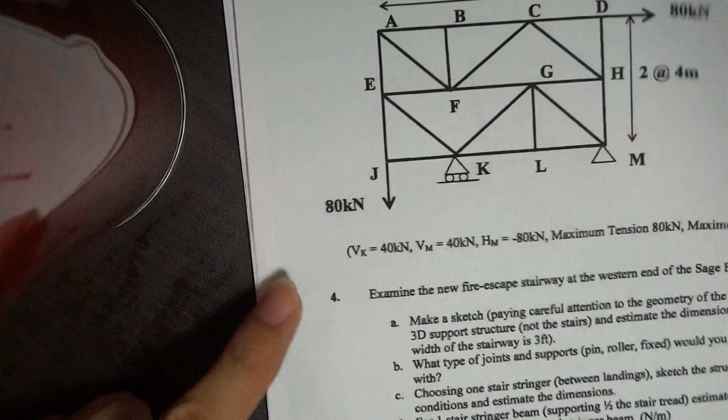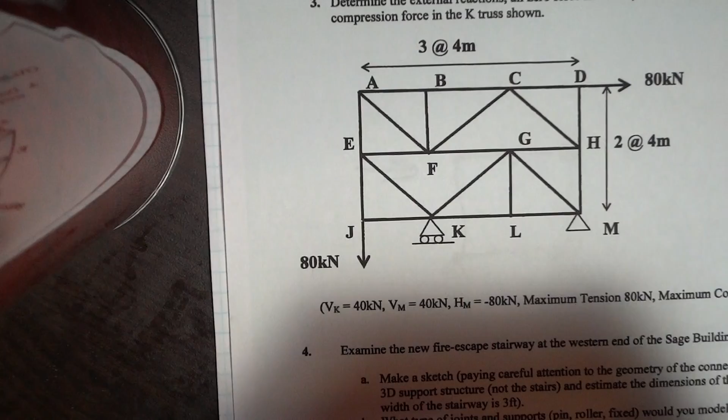Okay, so problem 3 is a longer version of number 1, but it's easier because it's a true truss. And the only point I'm going to go over here is how to find zero force members. The easiest way to do this is just by inspection.

I don't like wasting paper. This paper is expensive, you know.

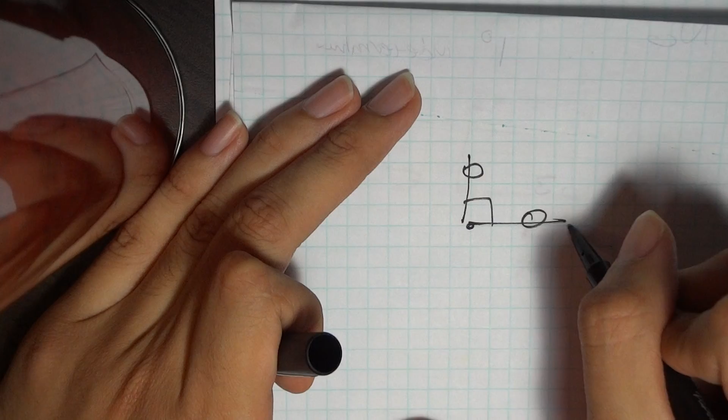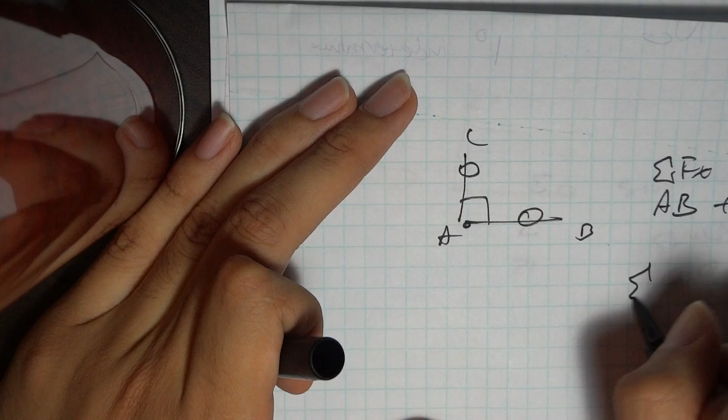So basically, if it's a zero force member, you either have two things meeting at right angles. If you have two things meeting at right angles, then these are both zero force members. If I do sum of forces in the x direction, let's call this A, B, C: AB plus 0 equals 0, therefore AB equals 0. Sum of forces in the y, AC equals 0. There's no possible way for me to have forces in this setup.

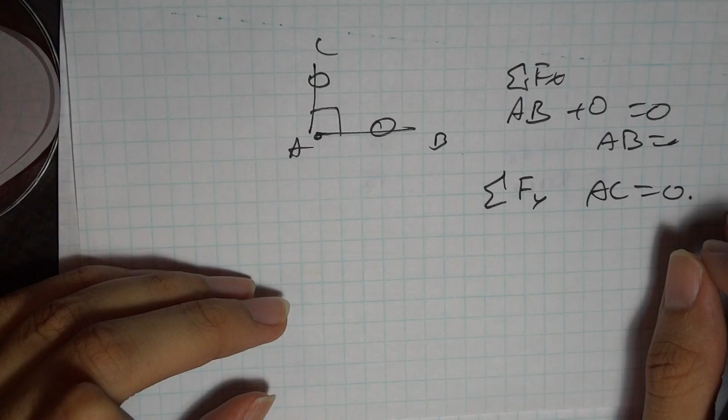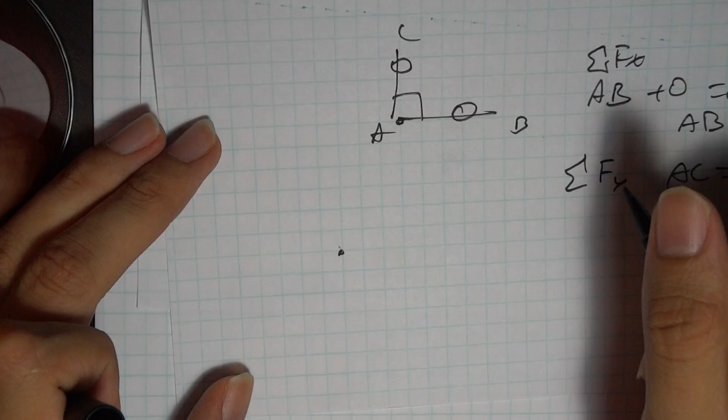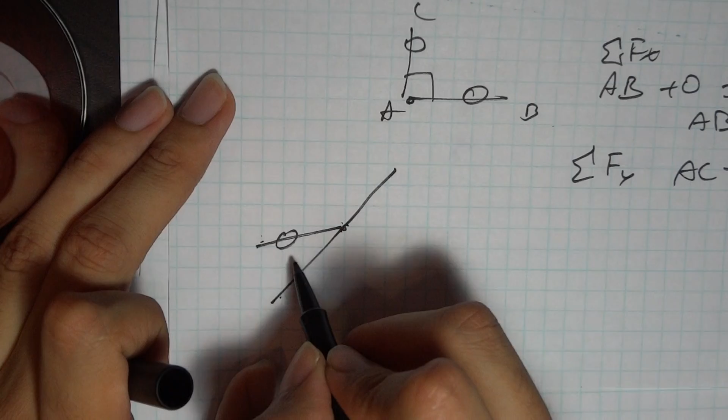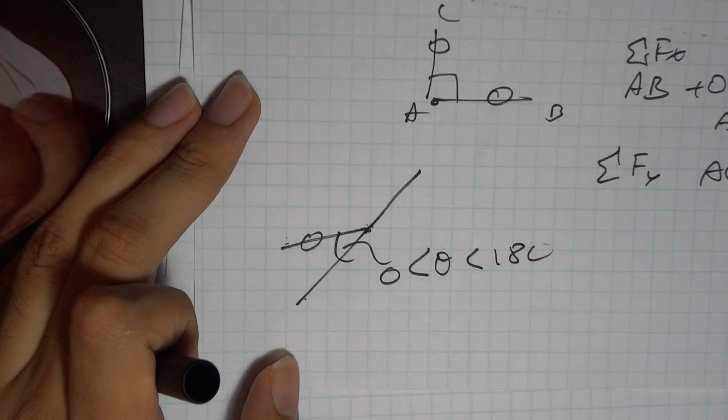I can also have a zero force member if I have three things meeting at a point. These two are what we call collinear - they're basically parallel, passing through the same point, so this is technically just like one line. This will be a zero force member. It doesn't matter what the angle is - as long as it's not 0 or 180, as long as theta is less than 180 and greater than 0, this will be collinear, and this will be a zero force member.

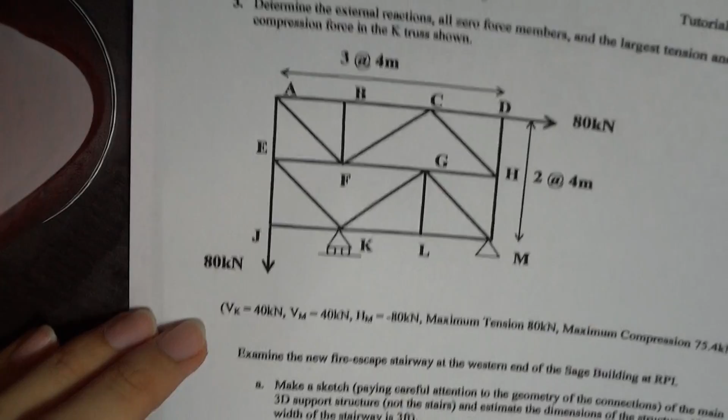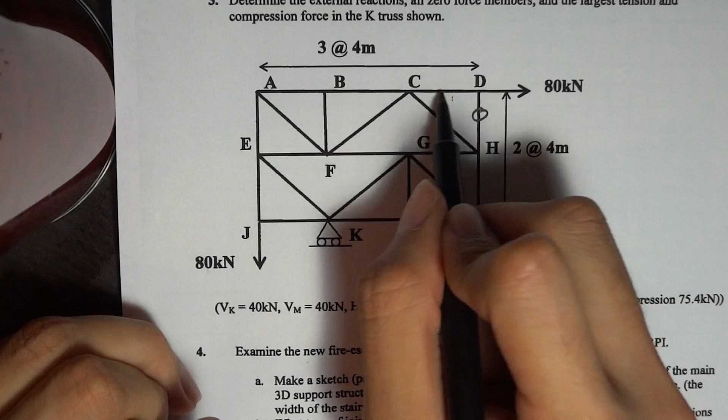So just looking at this, let's highlight what one of the obvious zero force members has to be. I have three forces - I have a force here, force CD, I have an applied force, and I have a force DH. This FDH has to be 0. It has to be a zero force member because these two are collinear, or they form a single line, and I have something coming into there.

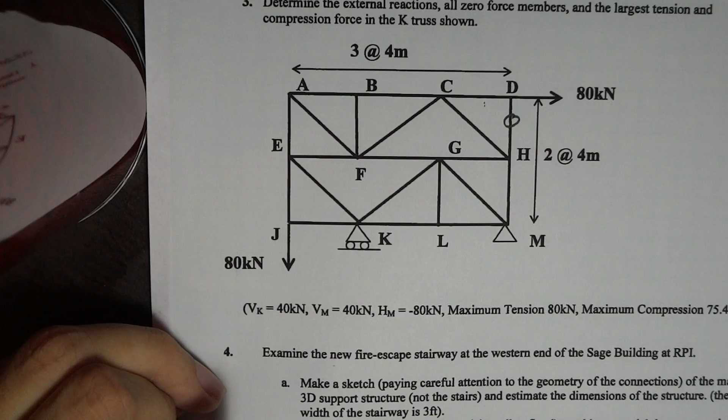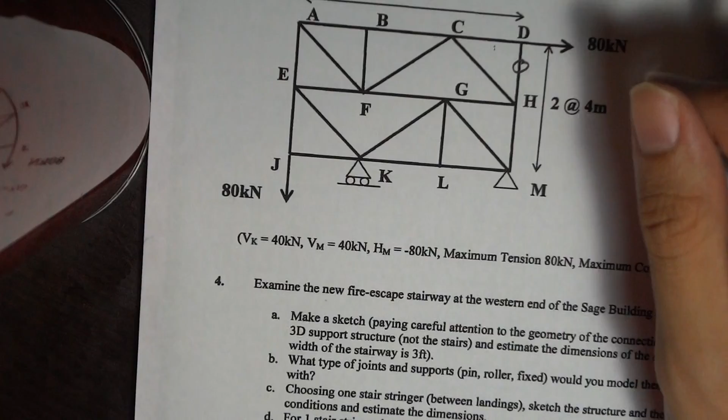I don't see any diagonal members that are collinear here, but yeah, that is a zero. So there's - I can't remember how many zero force members there are. I have this written down somewhere else, but I lost a sheet of paper. But there should be like, I don't know, 4 or 5 zero force members or something in here. So it's up to you to find those.

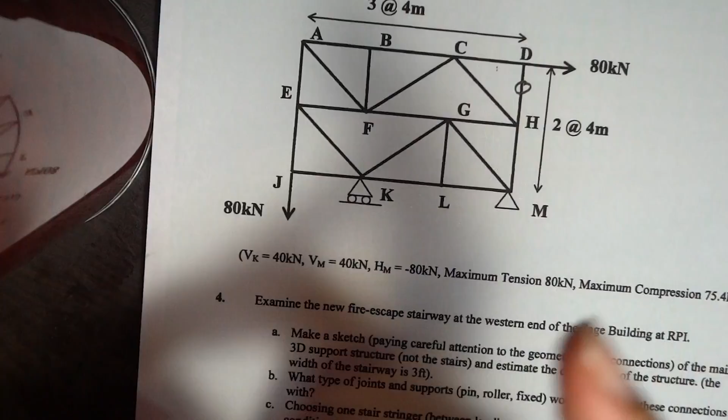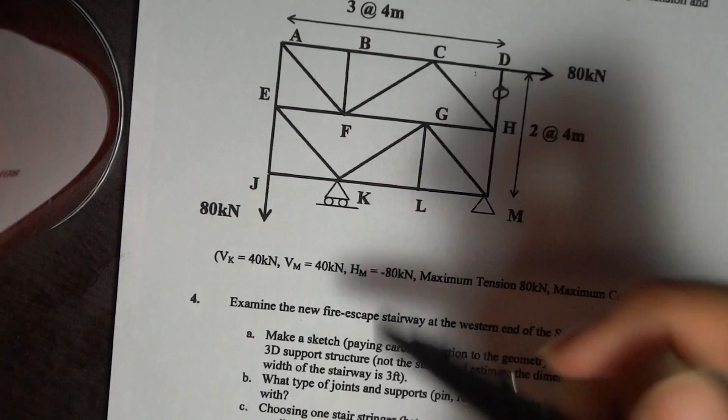Other than that, just use method of sections or method of joints, whichever one you prefer. Always start by finding your reactions, and then go to method of sections or method of joints. Oh, and don't forget you have two forces here - I don't know how many people are going to mess this up, but you have two forces here. So don't forget about both of them.

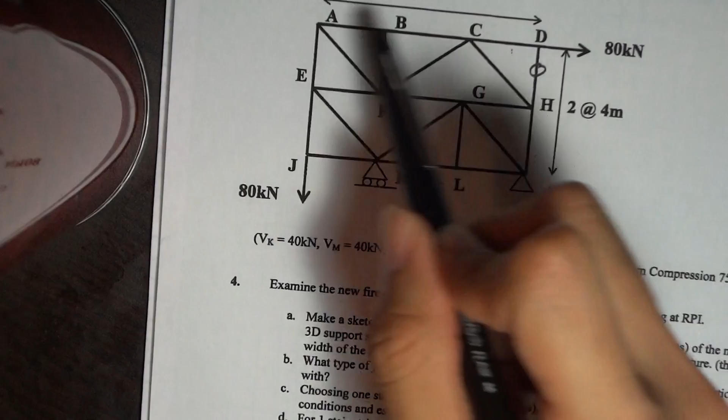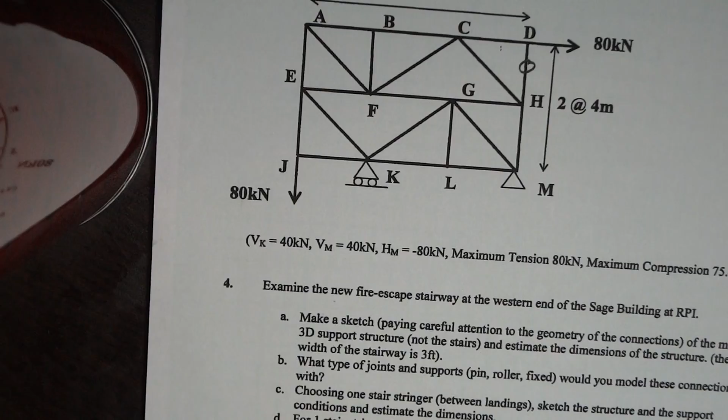And these lengths are all 4. You have 3 up here, 4, 4, 4, 4, 4. So for example, these angles - I think all the angles in here are either 90 or 45 degrees. Yeah, so let us know if you have any questions on this problem.